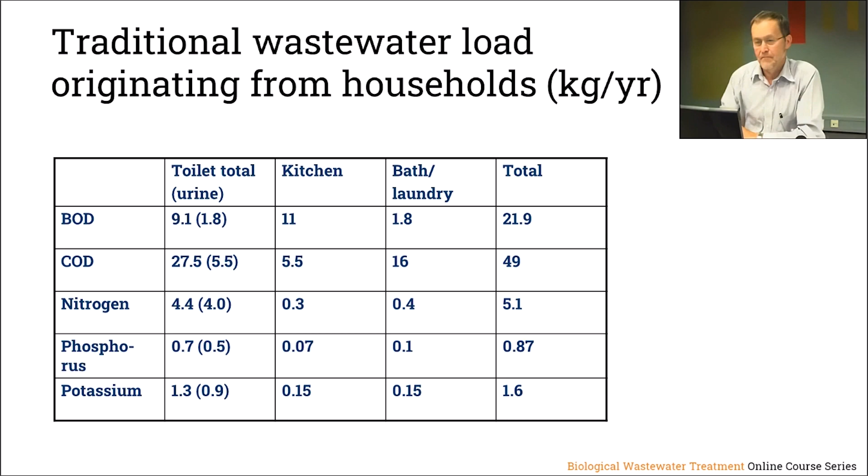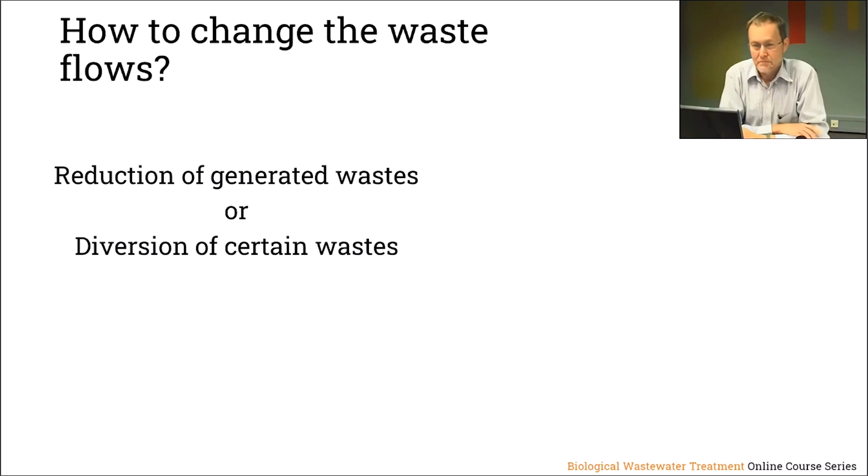If we want to change the waste flows from a household, we have two possibilities. We can reduce the generated wastes in the household, or we can divert certain wastes. And we will take a look at how this can be done. If we separate the toilet wastes, we can handle it as night soil, compost toilets, septic tanks, and so on. And that will affect the wastewater considerably. We can use urine separation, which is used some places.

In the kitchen, we have options there. We tend to send a lot of the waste in the kitchen to the wastewater stream when we do dishwashing or clean dishes and equipment. We can also take a considerable amount of that and transfer it to the solid waste fraction if we use what is called clean tech cooking. Instead of using the hot water to clean the pots and so on, we can scrape them and put what we scrape off into the solid waste. That will influence significantly the waste load in the wastewater.

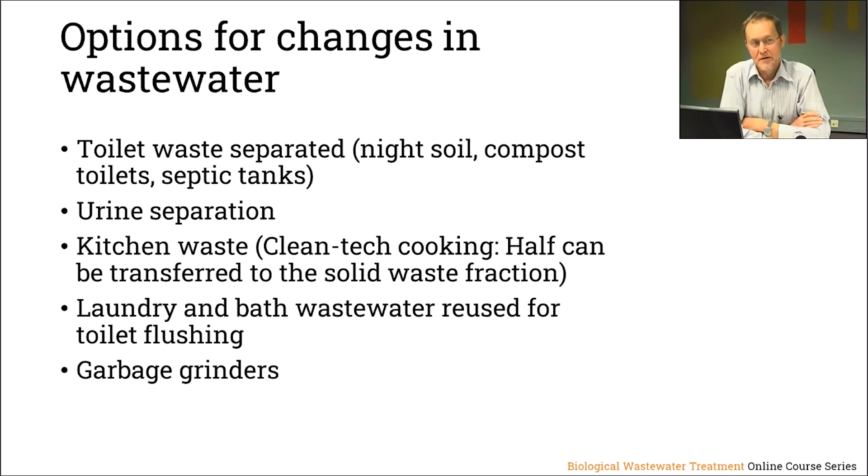We can reuse wastewater from laundry and bath, and we can use garbage grinders where we will increase the amount of material in the wastewater and reduce the amount of material to the solid waste fraction. So if we look at the household, we have two outlets of waste. We have solid waste and we have liquid waste in the wastewater. And we can decide to some degree in which waste stream the waste from the household should leave the house. So we can design our wastewater.

We can minimize the waste load to the wastewater if we want to get a clean wastewater, as clean as possible, by having separated toilets from the wastewater and the clean tech cooking. Or we can maximize the waste loads by using garbage grinders. And let's take a look at how this influences the wastewater.

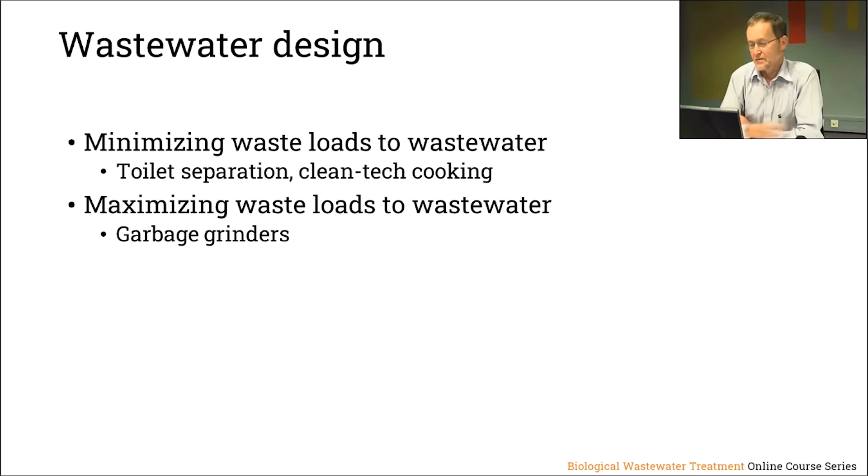If we look at how that influences the concentrations that we observe, then we have to take into consideration the water consumption in the household. And here we can see if we have a traditional water consumption, which might be in the middle, 160 liter per capita per day, we will end up with a COD concentration of 200, BOD 125, 9 nitrogen and 2.5 in phosphorus. In many cases the nitrogen concentration is below the effluent criteria for nitrogen from treatment plants, so we do not need any nitrogen removal in this case.

If we are very water conscious and only use half as much water, which is very little water consumption of 80 liter per capita per day, then of course we increase the concentrations of the pollutants in the wastewater. So now we have 19 gram per cubic meter of nitrogen in the wastewater. So now we have to treat the wastewater from the treatment plant for nitrogen if everybody saves water. So this is an interesting dilemma we have here. If we use a lot of water in our households, then of course we will dilute the wastewater further.

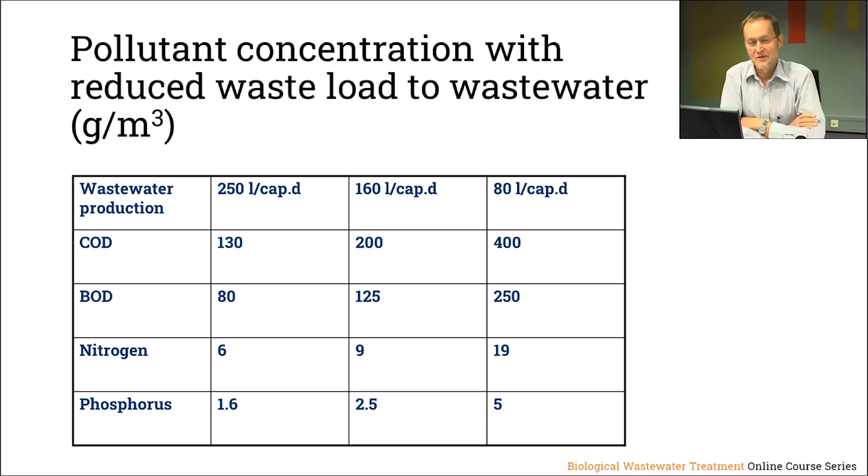So the effluent guidelines as given in gram per cubic meter have some problems if we reduce water consumption. It is not fair that we then have to treat the wastewater for nitrogen because of the reduced water consumption, because the load that goes out into the receiving water has been minimized and is the same and not dependent on the concentration of nitrogen.

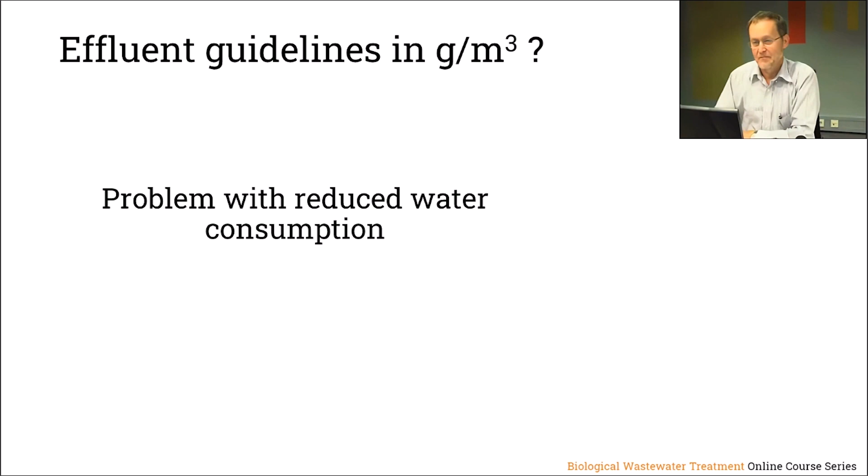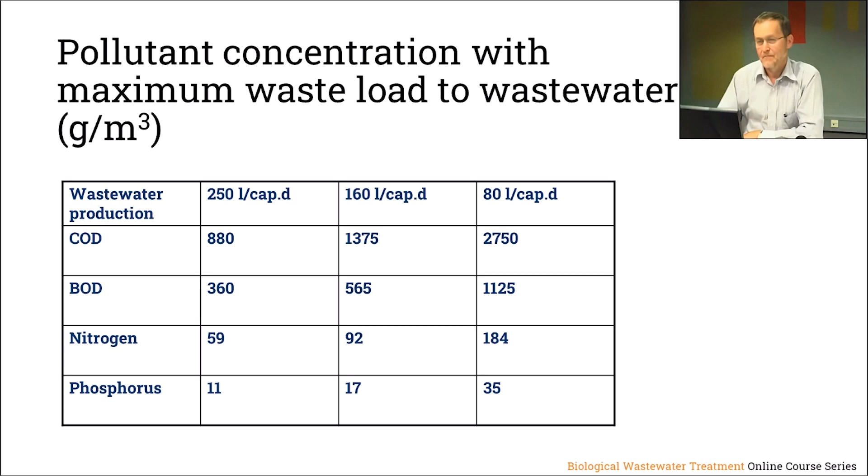Gray wastewater can often be handled locally, maybe reused for irrigation and things like that, while the black wastewater has to be handled with care because it has the majority of the microorganisms and is infectious.